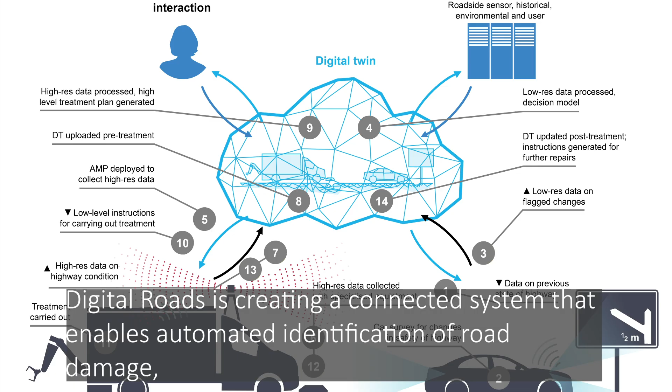I'm Lavendra De Silva. I'm a research professor in the Cambridge University Engineering Department and a director on the Digital Roads project.

Digital Roads is starting to see some useful and exciting outputs generated so far. For example, from the academic side, we're seeing about 60 research publications come out of the program.

From the industrial side, we've got a spin-off company, Didymai, whose sole purpose is to build digital twins for the built environment. We've also started to build our own simulation platform, which is able to simulate not just autonomous vehicles, but also our own in-house designed autonomous maintenance plant.

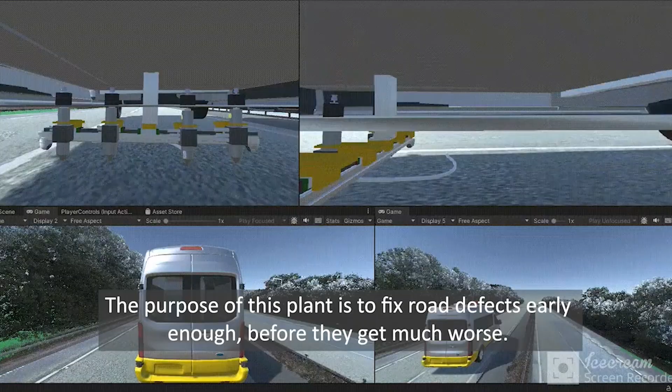The purpose of this plant is to fix road defects early enough before they get much worse. From the smart materials side, we've had materials that are able to withstand environmental changes much more robustly than traditional materials and cope much better with robotic extrusion.

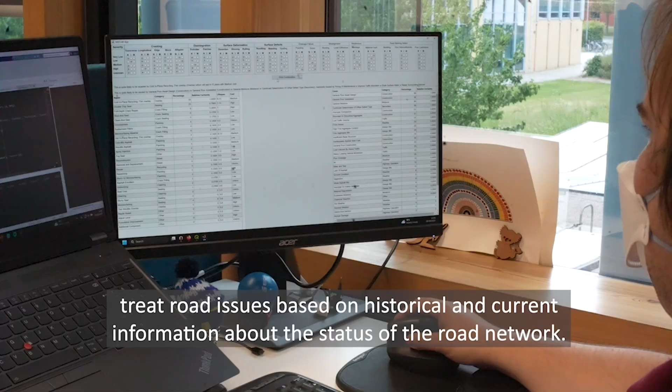The data science team have built tools that are able to, for example, generate treatment plans that are able to treat road issues based on historical and current information about the status of the road network.

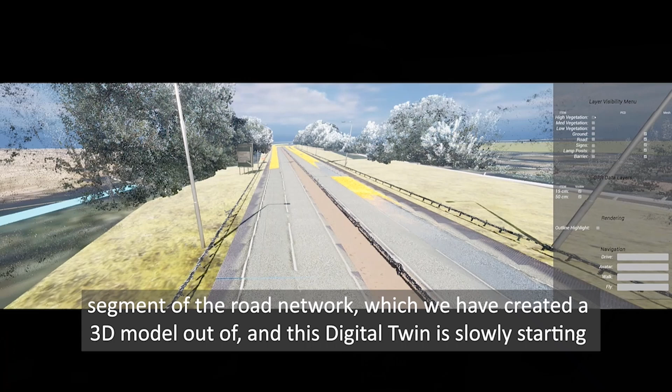And all of this comes together in the form of a digital twin. We've got a prototype already built based on about a 40-kilometer segment of the road network, which we've created a 3D model out of. And this digital twin is slowly starting to see dynamic data coming in from various sensors.

Going forward, we'd really like to focus on the impact theme in the project, and we'd like to see these outputs generate useful and beneficial outcomes for our industrial partners.

I'm Dr. Svetlana Besklubova, Assistant Research Professor at the University of Cambridge.

We are developing a comprehensive digital twin that leverages a foundation data model and reference data library to enhance interoperability and data security. By collaborating with domain experts, we ensure our solutions are scalable and future-proof.

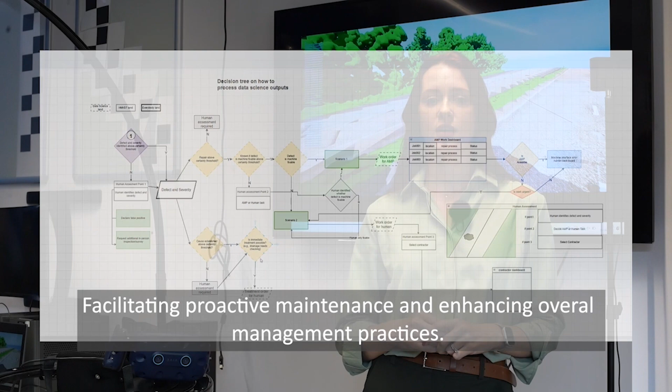We also provide solutions for the continuous maintenance of the digital twin by implementing real-time data integration from detected objects and properties, facilitating proactive maintenance and enhancing overall management practices.

I'm Dr. Lilia Patsiluika. I'm Industrial Research Fellow from Costain and I'm based at University of Cambridge.

Digital twins are complex systems made of multiple puzzle pieces, including updatable geometrical models, geographical databases, data science outputs, and insights. All these elements integrate in high-fidelity virtual environments and advanced interfaces.

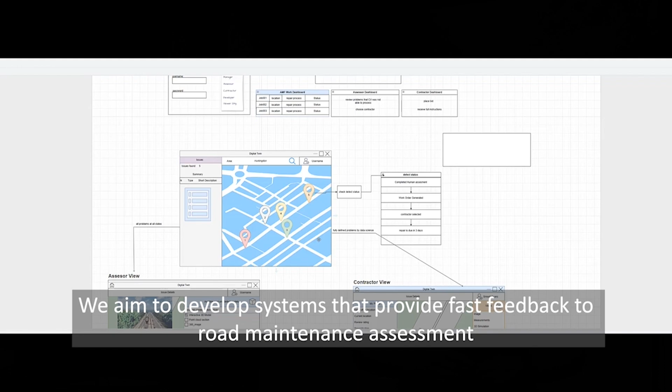We aim to develop systems that provide fast feedback to road maintenance assessment and enhance decision-making support.

I am Dr. Alix Marie-Davigneau, and I am the Industrial Research Fellow in Data Science at Costain, working with the University of Cambridge. Data science is at the core of our project, from recognizing road damage to diagnosing its causes and automating maintenance decisions.

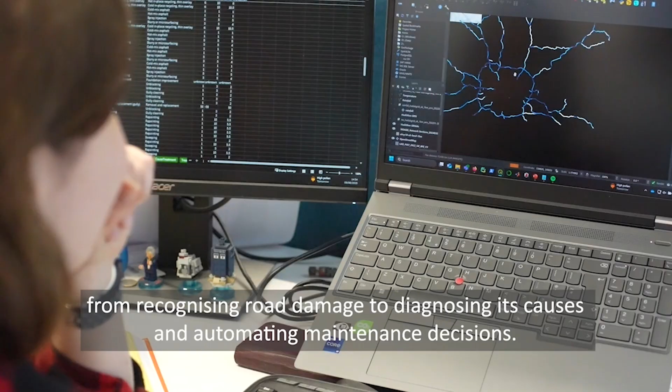We are leveraging statistical and AI-based methods to optimize asset management. One of our applications is predictive modeling, which enables us to anticipate road deterioration and take preventative action.

To work towards predictive modeling, we have been developing a comprehensive dataset combining defect counts with factors such as traffic flow, pavement age or material, and environmental factors.

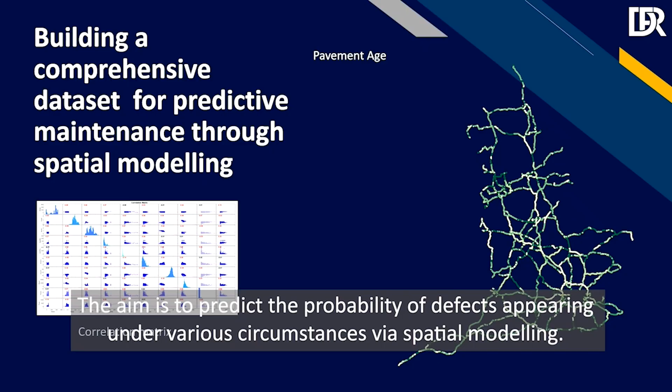The aim is to predict the probability of defects appearing under various circumstances via spatial modeling. This will help in reducing long-term costs and improving safety and efficiency.

My name is Stephen Green. I am a Senior Research Associate for the Department of Engineering here at the University of Cambridge.

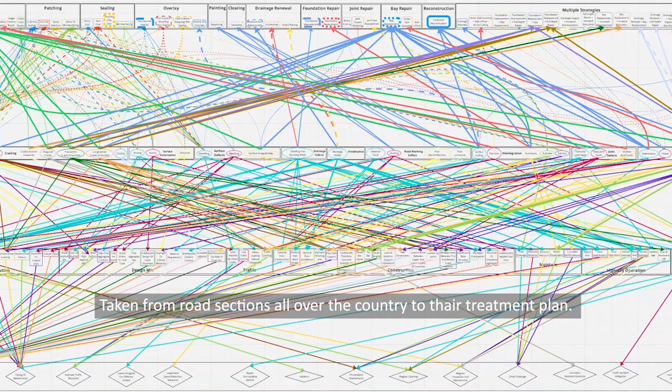Here in the Data Science Division, we're currently developing an automated decision support tool that translates the real-world data obtained from road sections all over the country to their appropriate treatment plan.

Our system observes defects and the severity of their condition and provides appropriate treatment plans based on what caused the damage along with relevant repair strategies.

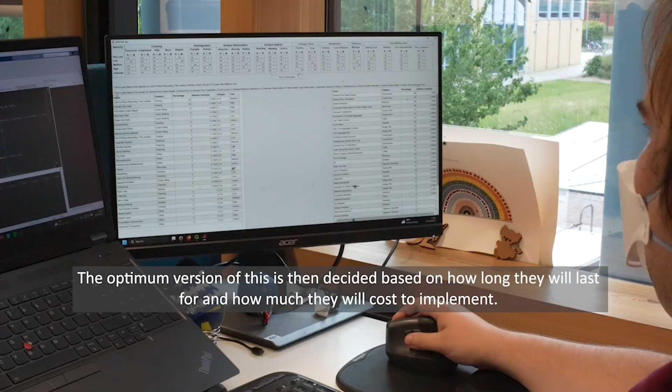The optimum version of this is then decided based on how long they will last for and how much they will cost to implement. This tool will be supported by existing maintenance data processed with the help of machine learning and distributed to researchers across the field.

My name is Damien Palin. I am a Senior Research Associate here at the University of Cambridge.

To prevent small-scale damage escalating into more dangerous and costly damage, you need materials that are both more durable and potentially handleable by autonomous systems.

Here at the University of Cambridge, we are developing a series of advanced repair materials for pavements. These include fiber-reinforced cementitious repair materials that are both twice as tough as standard materials, but also are handleable by our robotic systems.

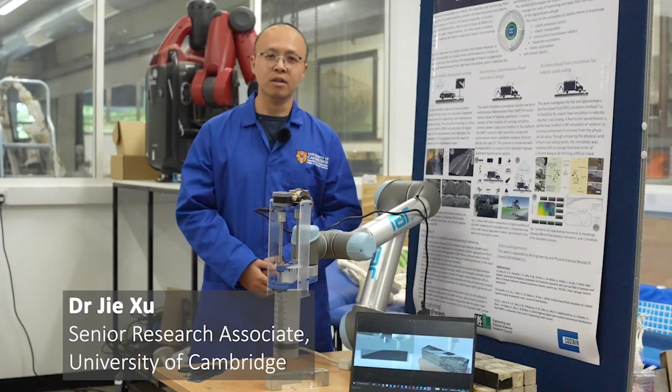I'm Jie Xu. I'm the Senior Research Associate in Automation and Robotics at the University of Cambridge.

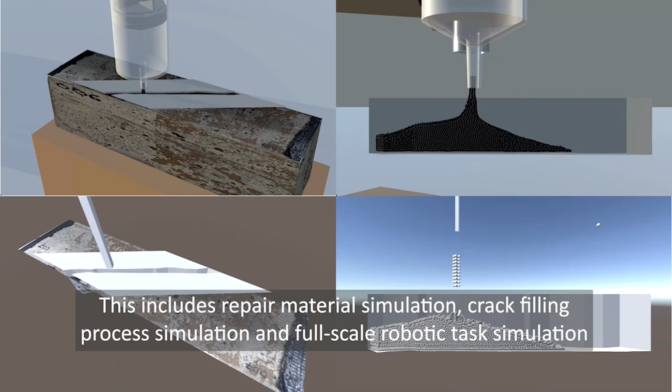To allow the optimal robotic pavement crack repair, we developed a physics-based, multi-level robotic crack repair simulation framework. This includes repair material simulation, crack filling process simulation, and full-scale robotic task simulation to predict the operation performance towards highly accurate and fast repair.

I'm Dr. Richard Anvo, Industrial Research Fellow at Costain, working for Cambridge University.

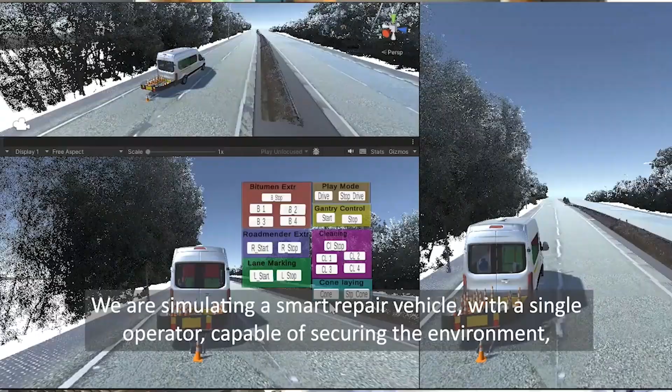We are taking road maintenance to the next level with cutting-edge autonomous technology. We are simulating a smart repair vehicle with a single operator capable of securing the environment, scanning road surface, applying innovative repair material, and updating the digital twins.

Our innovation is setting a new benchmark in road repair efficiency and durability.